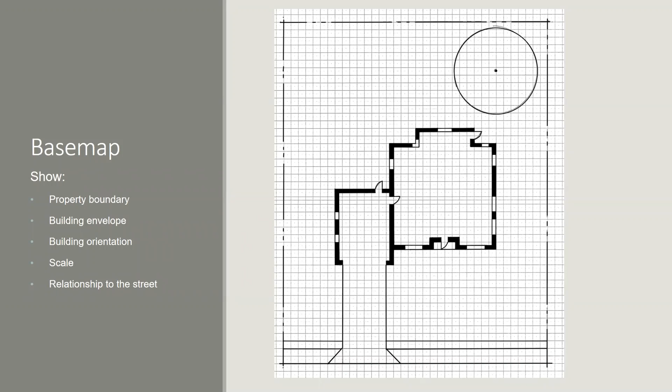And that starts with something as simple as a base map. I'm always surprised at how much money people spend on a landscape, or intend to spend on a landscape, and yet have no idea anything about the dimensions of their property. So from something as simple as a base map, we start to think about what we actually have on our site. In design, this is called an inventory and analysis.

We're looking at what influences our site. The wind, where does it come from? When does it come? Where does the sun shine? Where does it not shine? Where are utilities? What are the neighbors like? Where are the hot areas and the cold areas on your site? Are there steep slopes?

Where is water being wasted? Where is it coming from? Where does it pool? Where does it leave quickly? Where does noise come from? Where do smells come from? Where are the views? What existing vegetation do you have to work with? What planting zone you're in?

Where is water coming from on your site? Is it coming off your roof? Is it coming from your neighbor? Is there an irrigation ditch that overflows? All those kinds of questions reveal opportunities and constraints that you may not have realized before. And these are helping you start the process of deciding what you want to take advantage of and what you want to get rid of.

And the site inventory and analysis, as scary as that sounds, is as simple as this, what you see on the screen. It's spatially locating the opportunities and the constraints of your site. The cool part is, as you dive into this, it sets a foundation for which good design decisions can be made that are responding to the unique attributes of your site.

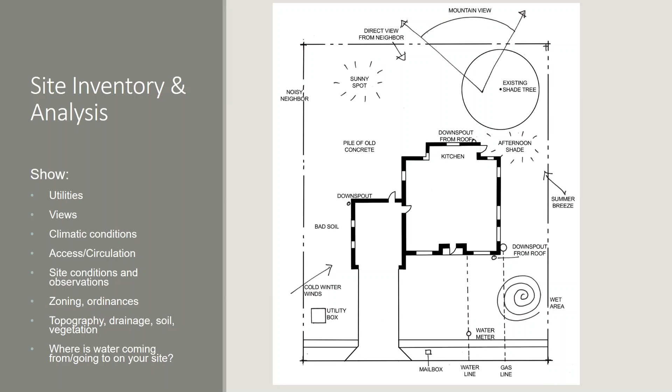Step 2, also like silly simple, is knowing what you actually need and what you want. This is the second step that I find almost exclusively no one does. This big question of what you really want your landscape to do for you. So that becomes what we call a vision and a goal.

So do you want a landscape that's a quiet meditation area? Do you want a landscape that's home to every kid in the neighborhood who comes and plays sports in your yard? Do you want a place to host big family gatherings and parties? Those are three different landscapes. And if you don't really understand what your goals are, you are going to have a really hard time measuring the success of your design.

In design, one of the things that most people struggle with is there is no right answer. There are good, better, and best answers, but there's rarely an equation that tells you if you got it right. You have to set your own equation. You have to create your own measuring stick. And that comes from setting goals and a vision.

So what we ask people to do is generate what we call concept plans, where they're marrying the bubbles, the relational functions, to their own site. So they're respecting where there's areas of water, areas of intense sun, where the sun is reflecting off the building. Those are places where you want to put certain things and not put other things. But those things also have relationships between each other.

This seems very simple, but it's something you can do very quickly. The power of design is doing things iteratively and learning from each time you do it. So this is something we ask people to generate a bunch of.

The problem is, if anybody here is a contractor, you realize you can't build anything from a bunch of bubbles, right? This is not what you would share with your neighbor and say, this is what we're going to build. So when you find a concept plan that you like, you've done a whole bunch of these arrangements of bubbles, you've checked your site inventory analysis to make sure those things align with each other and they're in the most optimal relationship in the optimal place on your site.

Then we are going to apply what you traditionally know as design. It is taking apart this landscape and applying the principles and elements of design.

For those of you who have ever taken an art class, even probably a music class, these are the same general ingredients everybody has to work with. Good designers just know how to work with them better, okay?

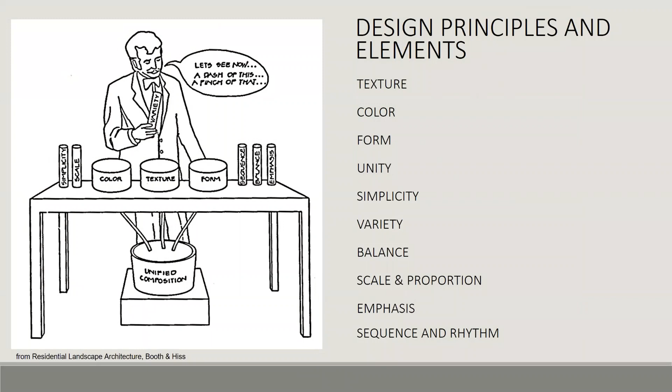So the way I think about this is like a scientist, but also a chef, right? These ingredients we all have, and the ratios at which we mix them, are the difference between something really delicious and something maybe not so delicious. So I'm going to go through a few of these principles and elements to help give you a flavor of what we look at as designers.

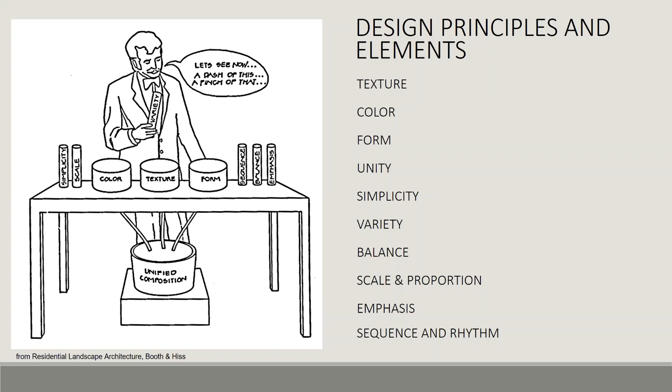So the first is form. It's the large shapes and dimensions that we use to create overarching structures. On the left, squares and rectangles - everything in there is a square and rectangle, or most things. And because of that, you can read it as a cohesive design.

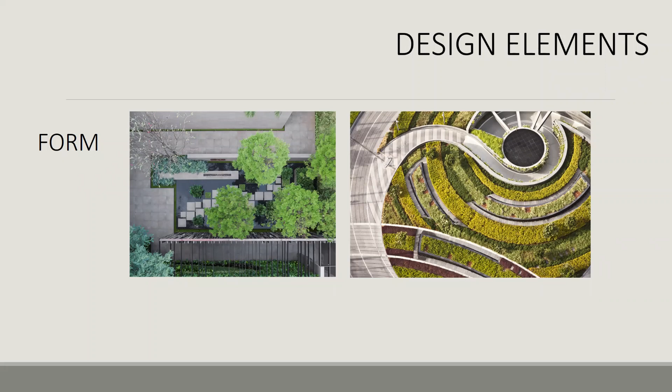On the right-hand side, everything's radial, right? Those decisions to do anything - if you were to choose a bench or any aspect - it's probably going to have a radial feel to it so that that design holds itself together. We also play with colors, and I'll talk about how we mix and match these things. And then we play a lot with textures. Textures are a pretty powerful way to engage people in wanting to touch and move through a site because of the interesting textures we have.

Okay, so the other aspect I want to talk a lot about today is this idea of unity. This is something I'm going to go into depth on, that we struggle with in water-wise landscape designs.

I love that. Yes, no, the compost near the noisy neighbor. Yes, on purpose. But there is a purpose, right? There was a reason for putting the bubble there.

So when it comes to unity, water-wise designs, or I guess our traditional designs, tend to be unified by a single element. So I'm going to show you an image. Now, what I want you to pay attention to in a couple of these is where your eyes move. Okay, so I'm going to share an image. I want you to be very conscious to how your eyes move around the image.

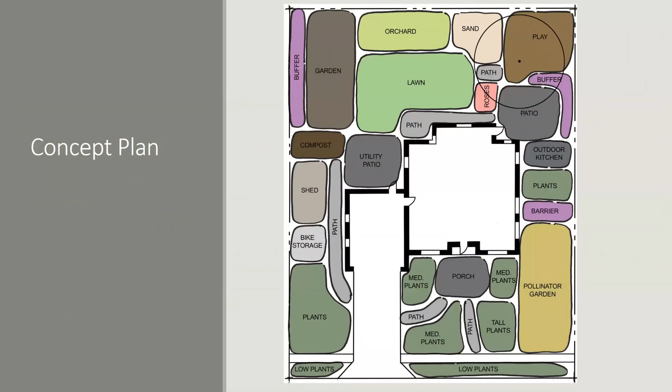So what we do with students, or what we ask our participants to do, is take their bubbles and explore different forms. On the left, it's the exact same bubbles, the exact same elements—there's a patio, an entrance, a grass area, a garden. Exploring different forms is what we call form studies, forcing participants to double down on some sort of form they feel comfortable with. And these forms can be aesthetics, right? Some people really like the naturalistic curvilinear stuff.

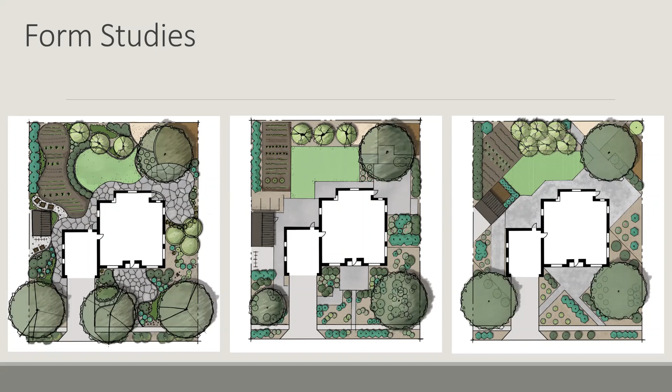Some people really like squares and rectangles. Some people want more energy, so they go with more of an irregular pattern. Your home can inspire this—the architecture of your home, your general aesthetic presence or preference. But you know that this form is going to function because you've already done the work of putting the bubbles into place.

This is about trying to find that sweet spot of unity, variety, and harmony. What I'm finding more and more is those landscapes that adopt a strong form tend to weather the storms of over-variety or over-unity better than those that don't commit to a form.

So what I'm advocating for is when you pull out something like turf as a unifying element, you've got to replace it with something else that's equally unifying, that's not overly bland, like a sea of turf, a sea of gravel, or a sea of mulch.

And I'm not a turf hater—there are clear reasons for it existing. But when we have it in places where other program elements could succeed, we've wasted an opportunity to diversify our property.

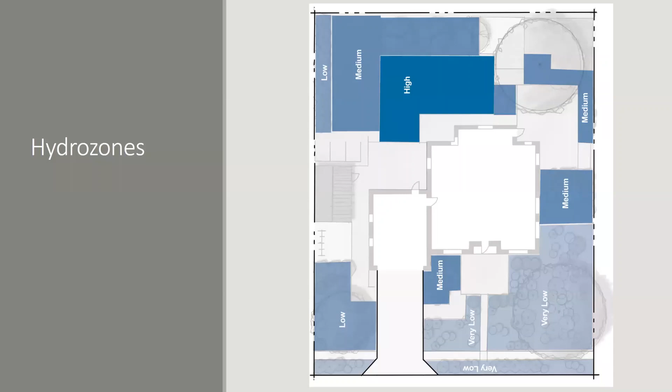It can be as simple as this—this is that same residence, with low, medium, and high water requirement zones, as simple as you can get. This allows us to design our irrigation structures and think about how we're going to move water on our site. In the Intermountain West, we get an enormous amount of water, sometimes at the wrong time of year.

So the idea is how do I move water to where I want it and soak it into the ground so that the plants I have can actually get hold of it, and I don't just let it move off my property and miss that opportunity to harness the water I'm already receiving. There's a tremendous amount of technological ways, like rain barrels or cisterns, but there's also a lot of simple ways of getting really good soil full of organic matter and letting water get to it, then putting things on it that want to use that water.

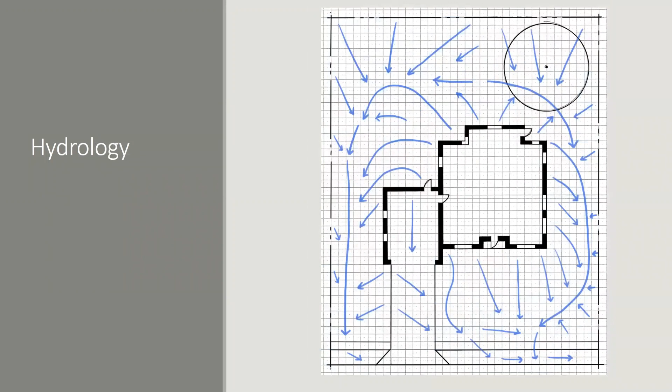That can be done through this idea of hydrozoning and then grading your property to move water where you want it. Another detail people get really excited about is plants. I like plants, but I want each plant to provide me something in return for the water I'm spending on them. So as a designer, I might be looking at plants as a way to provide form or emphasis.

It's a way to get color and variety, perhaps, and also a way to get some texture into my property. When we start to think about plants as workers, as contributors in our landscape, we might be more selective about where they go and who makes it on the team in our landscape. So we want them to be problem solvers.

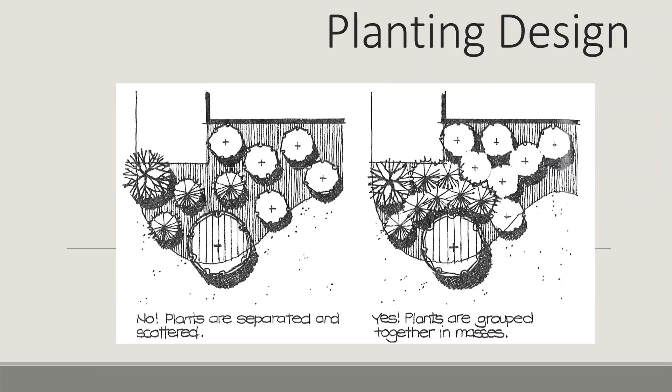We teach a lot about planting design. I'm just going to cover a couple of simple tips. One is, and the simplest thing you can do, is mass your plants together. In these images, plants are kind of scattered all over the place, standing alone. There's a lot of variety of different colors and textures, and not a lot that ties them together.

In either of these landscapes, it can feel kind of chaotic, versus this, where you have a smaller plant palette grouped and massed together so they have a lot more power as a single plant. So these are just a couple of simple ideas, ways to deal with plants.

I do want to just highlight this idea of turf. In Utah, we're really focused on non-functional turf - turf that isn't accomplishing its given destiny of being a great place to run and play and wrestle, not just a place that holds the dirt down. There are higher and better uses.

There's an enormous amount of technology out there that helps make your irrigation efficient. My point in the design process is, if you're making poor design decisions efficient, maybe go back to the poor design decisions rather than trying to update or make it more efficient. Ask that question: do we need to water this, or is there a better use for this area?